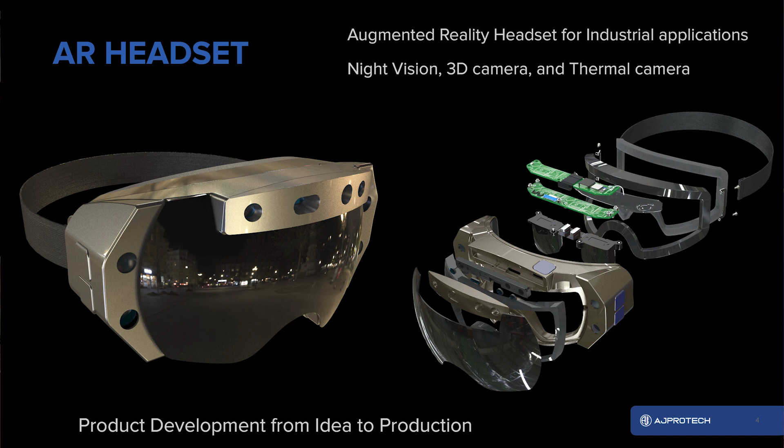At AJProTech, we do product development from idea to production, and I'm going to share a few case studies which you'll be referring to over the course of this presentation. The first one is an AR headset we've developed for the US Army, for industrial applications. The second one is Bluetooth industrial headphones with active noise cancellation and Bluetooth and radio. And finally is an IoT device, a small, portable Bluetooth padlock that uses a mobile phone to open and close the lock.

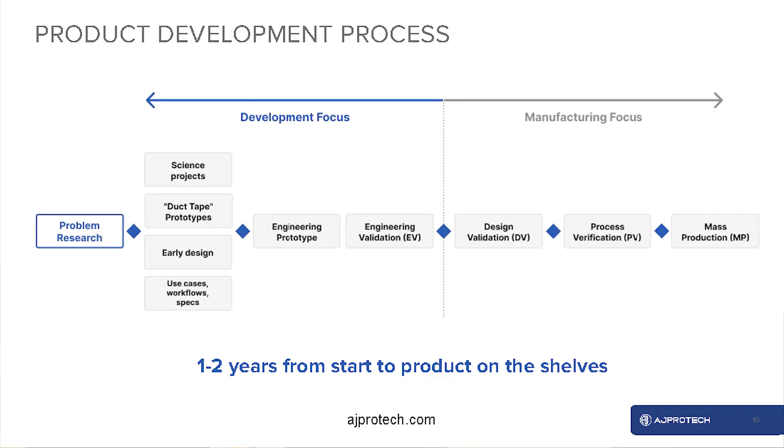So every one of you who is involved in a product development process probably heard about this workflow, when you start with a problem research, you do engineering prototypes, you go to 3 validation phases, EVT, DVT, and PVT, and then you go to production. On average, it might take anywhere from 1 to 2 years from start to product on the shelves, sometimes even longer. So following the process is really critical.

Every company has its own secrets and its own way to develop. I'm going to share a few secrets of ours. At AJProTech, when we start new projects, we start with a process called feasibility study. It's a time for us to do solution research, create product specification, create early industrial design, select components, and create proof of concept prototypes. The goal here is to select core technologies.

When clients come to us with an idea to create a new product, we ask them 4 questions. What problem are you solving? Who is your customer persona? What are the must-have features for the device? And what's the target pricing?

After those 4 questions are answered, we get to our job. We start with solution research, researching what similar components, similar products are available on the market, see what is patented and what can and cannot be used, and we select core technologies which allow us to fulfill the product requirement.

Next step is to create a really good product specification. Every company has its own vague, short requirements in most cases, but it's really important, it's really key here to be specific. A good product specification covers anywhere from 7 to 15 pages long, and it covers not just the must-have features, it covers the operating conditions, storage conditions, mechanical requirements, water protection, electronic features, and so on.

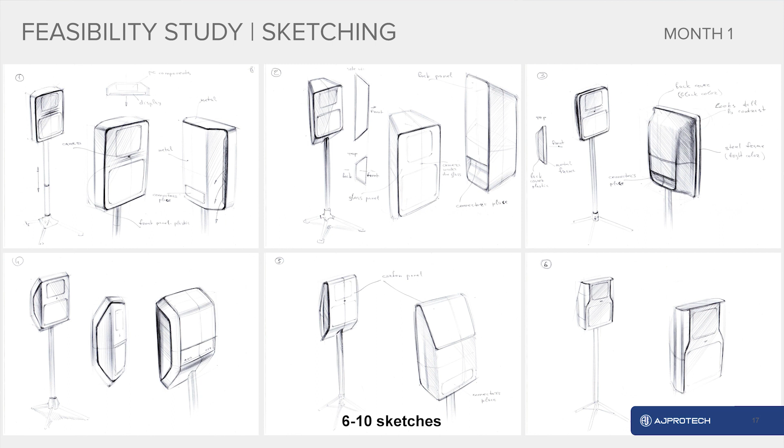Now that we know what we are creating, it's time to visualize it. Our industrial designers work on low fidelity sketches, 6 to 10 options, to determine what the possible shape for the device is. Is it going to be round or rectangular? What are the angles going to be? So we do 6 to 10 different options so we can pick from them later on.

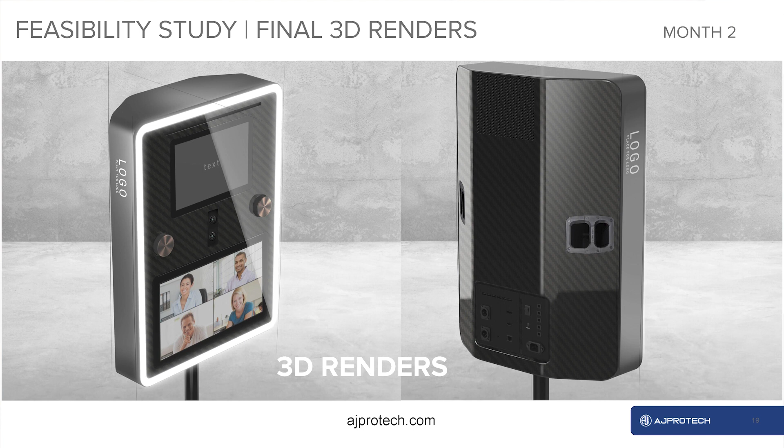The next step is when industrial design meets the actual components. It's a time for us to visualize how they're going to fit into the product. So we take 2 to 3 optimal sketches and we go deep with the integration. At the end, we have a set of high-quality renders, which can be used either for marketing or by mechanical engineers for further development.

Once we know what we want to create, it's time to create something tangible. We call it looks-like prototypes. They don't work, but they are the same size and shape as the final device. Nothing gives you more clarity on the product than feeling those products.

In parallel with the looks-like prototype, you want to prove core technologies. If your product has any sort of connectivity, get the evaluation board, get it connected, and get the sensor data to the device. Don't use Arduinos at this stage, use evaluation boards - this is how you save a lot of time later on. Just use evaluation boards which are close to what you're going to be using eventually. On average, it takes about 1 month to create such prototypes.

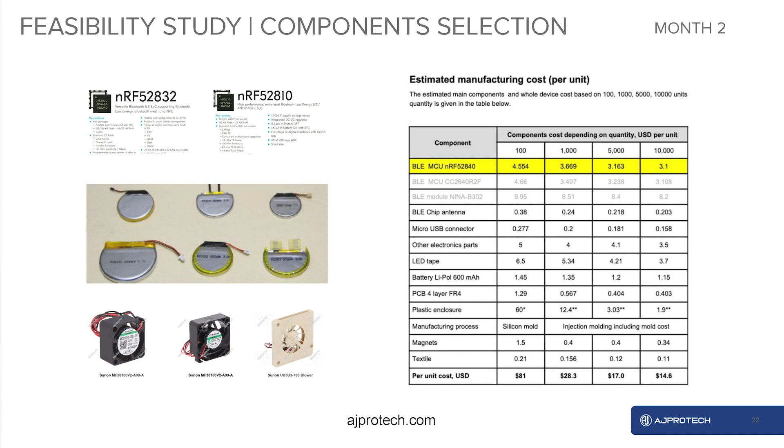Next phase is to select components. Before you put significant energy into engineering, you want to put everything you know about the product into the bill of materials and calculate the cost. You want to know how much it's going to cost before you design the actual physical product.

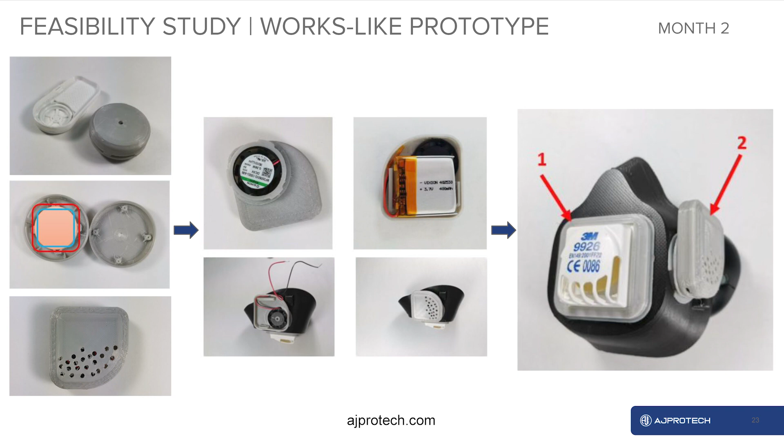Sometimes if it's unknown how the product is going to operate, it pays off to create a low fidelity working prototype. Just get a battery, get a fan, connect them together in a simple enclosure, and make sure the device works. On this example, we have a mask which was pulling the air inside, so we tested whether it's actually giving enough air.

Sometimes when the product is really complex, it makes sense to get a couple of evaluation boards and connect them together, so you have the entire device functionality assembled on a table. This example uses 2 evaluation boards and a set of wires to prototype the product before we go into functional prototypes.

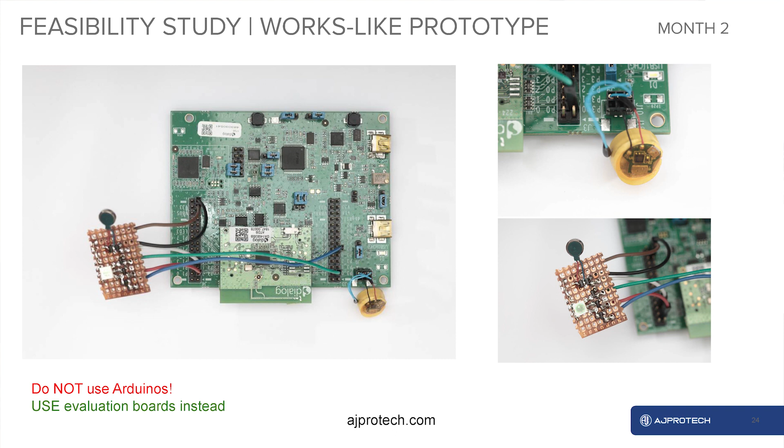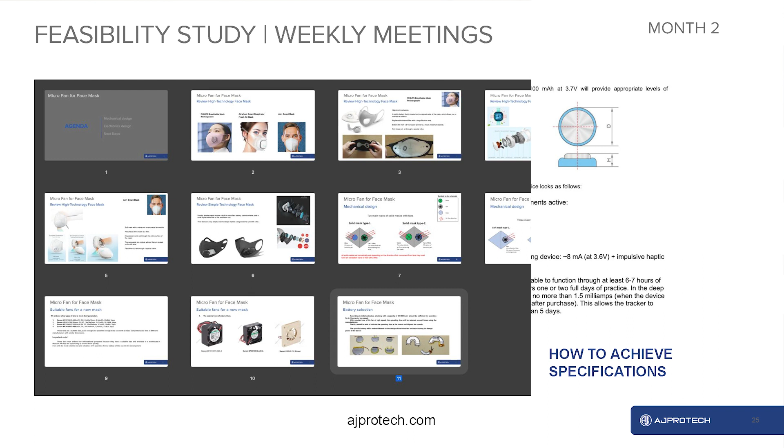Finally, once you know what components go inside and how it's going to look, it pays off to put everything in a document - we call it the technical proposal. When the specification documents what you're creating, the technical proposal documents how you're achieving those specifications. This document is typically about 10 pages long, and it documents everything you found out. It's really important to align all the stakeholders.

We recommend having weekly meetings with all the engineers, the product owner, and project manager, so they're all on the same page. Document all decisions made and keep all stakeholders aligned on the process. So that was the feasibility study - on average, it takes us about 2 months from idea to knowing exactly what we are working on.

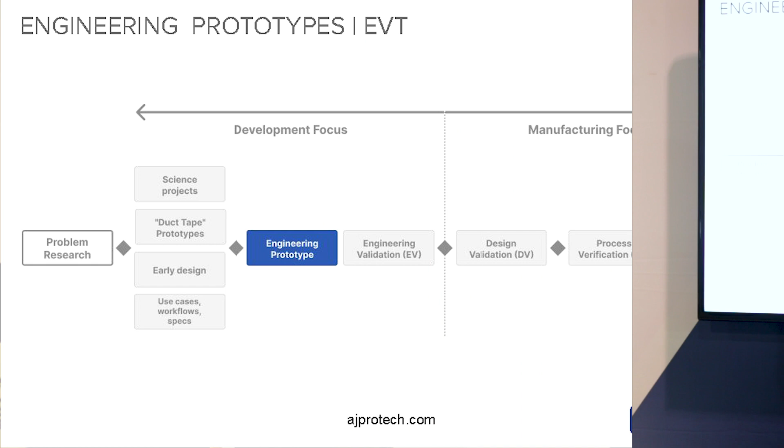Next step is engineering prototypes. This is the most intensive process for the entire product development, followed by engineering validation test at the end. The core goal at this stage is to validate all components. There is no tooling involved, no cost optimization, and unit cost is usually high.

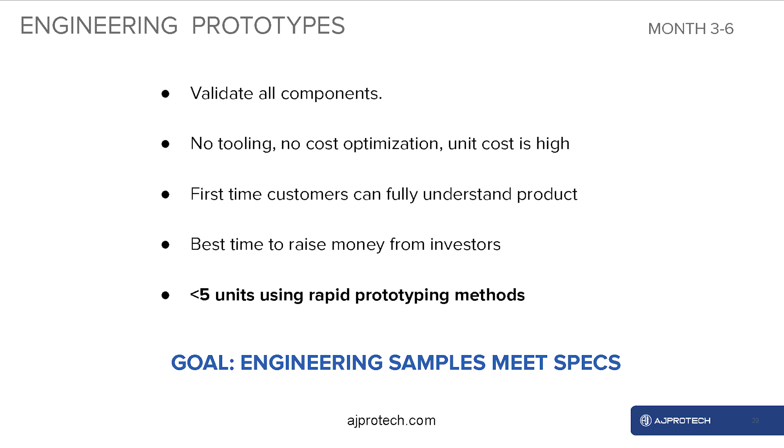It's a time when your first-time customers can fully understand the product. It's the best time to raise money from investors, and you usually create up to 5 prototypes which can be shown to potential customers. I'm going to show you a case study which we're going to be discussing later on.

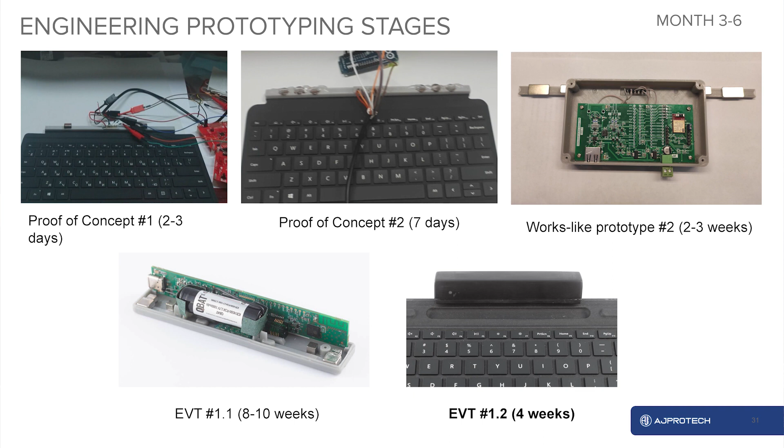This was an adapter for a Microsoft Surface keyboard, which you connect to the keyboard and then use it wirelessly. For that project, we created up to 5 prototypes. We started with just wires on a table, then evaluation boards with some magnets, followed by a PCB in a simple 3D printed enclosure, and then we compressed all of this into the final shape for the device and created good-looking prototypes with final shape and functionality. On average, it took us about 4 months to create all those iterations.

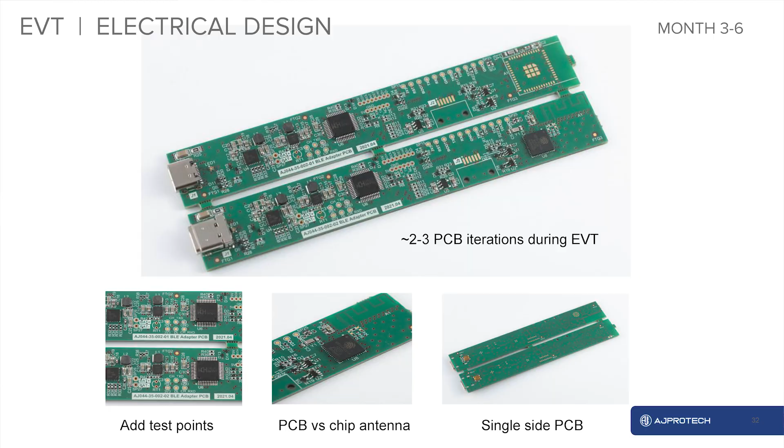Typically, you expect anywhere from 2 to 3 iterations of PCB design during prototyping. It's fine to have some wiring as long as the device does its job.

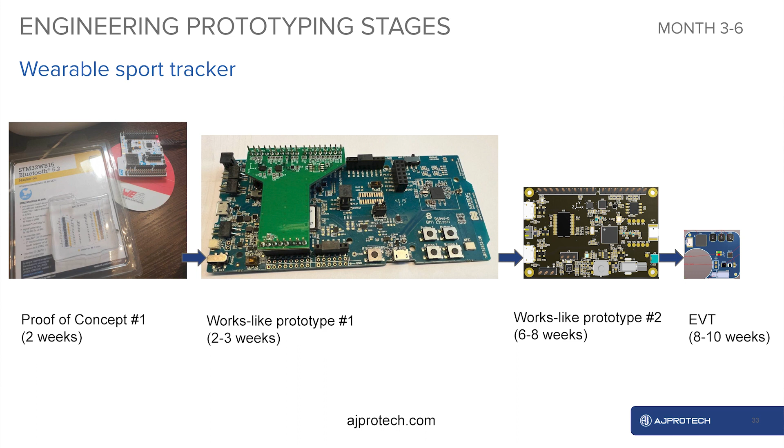Another recommendation for this phase is to add complexity gradually. There is no benefit of over-miniaturizing the device from early on - it's going to be very hard to troubleshoot. So start big on an evaluation board and eventually get smaller: validate components, validate schematic, and then make it final shape. This way, you don't waste time if something goes wrong early on.

As I mentioned, it's okay to use some additional wiring on the prototypes as long as they're functional. There is no need to be pretty here - the goal is to make it work.

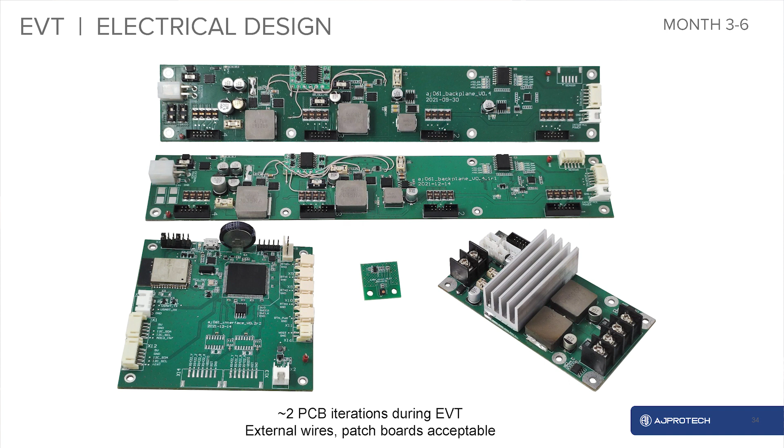A few recommendations for electrical designs: at EVT, forget about Raspberry Pis - they're nowhere near ready to be used in a product. Use evaluation boards instead if you need to.

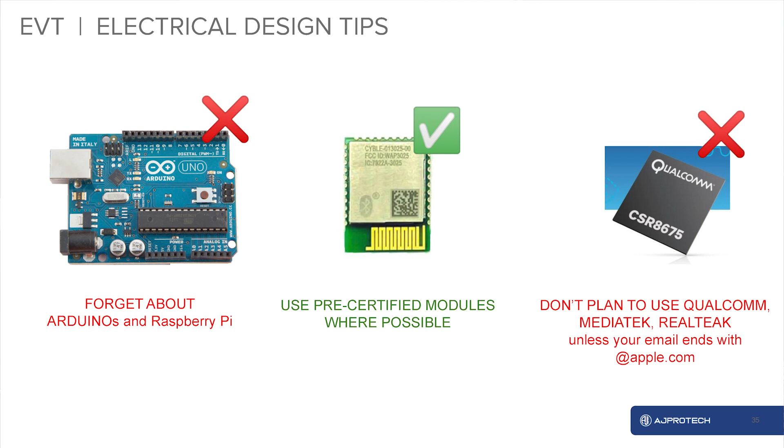Use pre-certified modules where possible - they allow you to simplify your product development and streamline your compliance. And finally, if your email doesn't end with apple.com or another big company, don't plan to use Qualcomm, MediaTek, and Realtek. They are really painful to work with, even to get some prototypes.

A few more recommendations for electrical engineers: check lead time prior to selecting parts. It's especially important in 2022 - most of our designs are driven by availability, not by functionality. It's a hard truth these days.

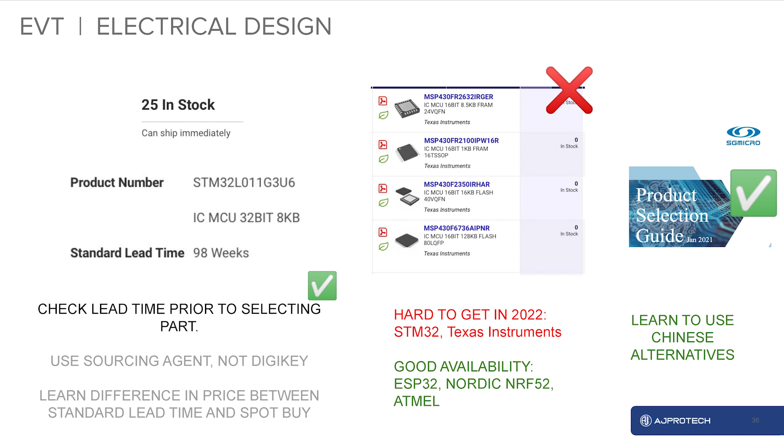Some components which are really hard to get these days are STM32, Texas Instruments. We switched them for ESP32, Nordic nRF52, and some Atmel components. And finally, learn how to use Chinese alternatives. Many of those companies have pin-to-pin replacements which perform the same as TI, but they are much easier to get these days.

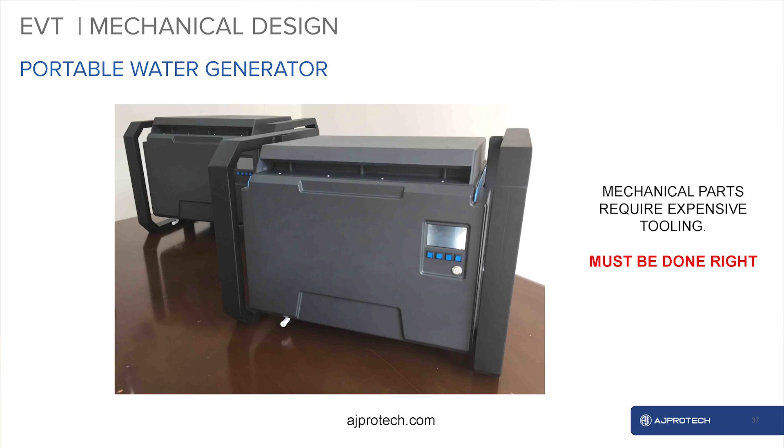So we covered electrical portion. Let's go to mechanical. For that one, I'm going to introduce another case study of ours, which is the portable water generator, which has a lot of mechanical parts. So this is going to showcase our mechanical job the best.

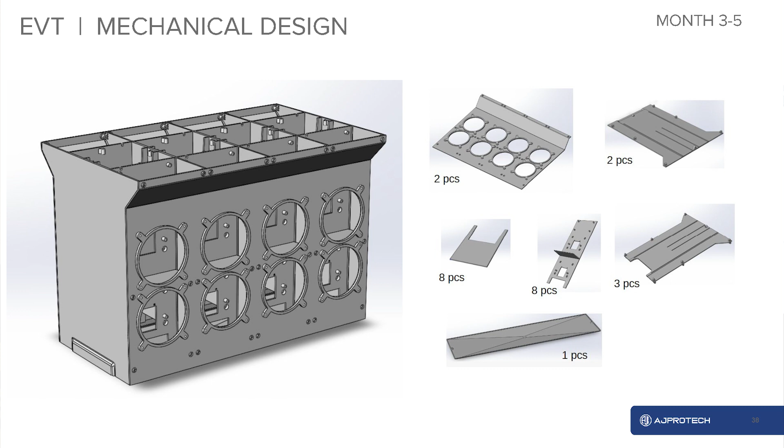When you start working on a prototype, you need to think how each part is going to be manufactured. So before you start doing any design, just divide your product into pieces and think about how each one of them is going to be manufactured.

There are multiple ways to prototype mechanical components. I'm going to cover 3D printing, CNC machining, and silicone mold. 3D prints are typically the easiest to get, no startup cost, they're cheap and fast. Quality is on average so-so. When you want to have better quality or better look, CNC machining is a better alternative. When you carve the unit out of solid piece of plastic, it requires some certain design considerations. For example, how far the mill can go in a plastic.

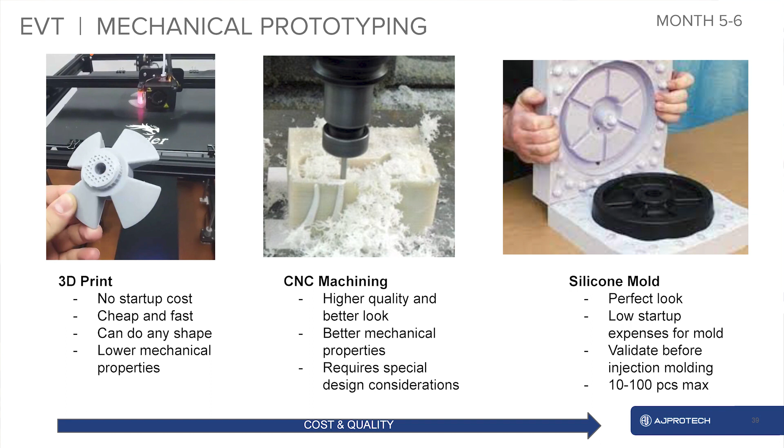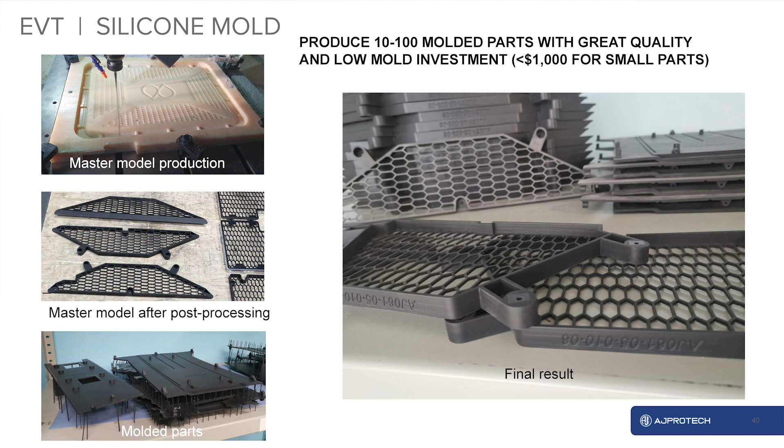And there is one other option which we use a lot. It's called silicone molding, and I'm going to cover this one in detail. This allows to create really high quality prototypes without big investment for tooling. So the way it works, you do the master model, either CNC machine or 3D printed, you polish it, you really make it look nice and feel nice. Then you put it in a solid piece of silicone to create a cavity, and then you pour the melt plastic inside that silicone. This way you can create anywhere from 10 to 100 pieces with really high quality and low investment into the tooling. Usually it's below $1,000 for small parts. And those components look exactly as the injection molded units, but you don't pay thousands of dollars for the mold.

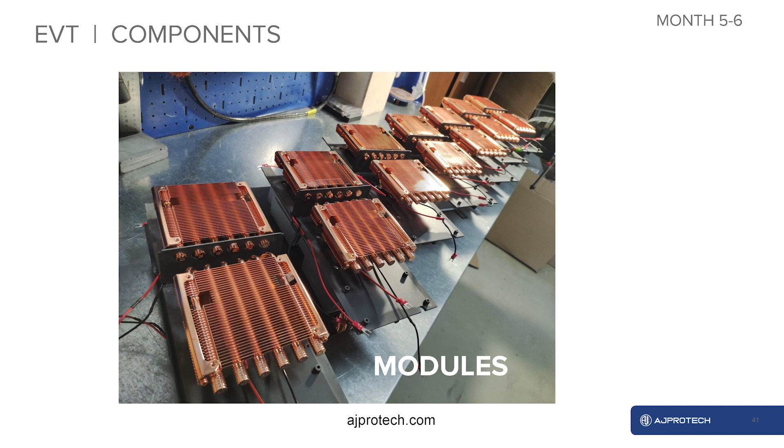Once mechanical components are there, assemble modules. This is the time to lock down on which components you're going to be using eventually. So take your time to validate things here. There are no significant changes for components after EVT phase.

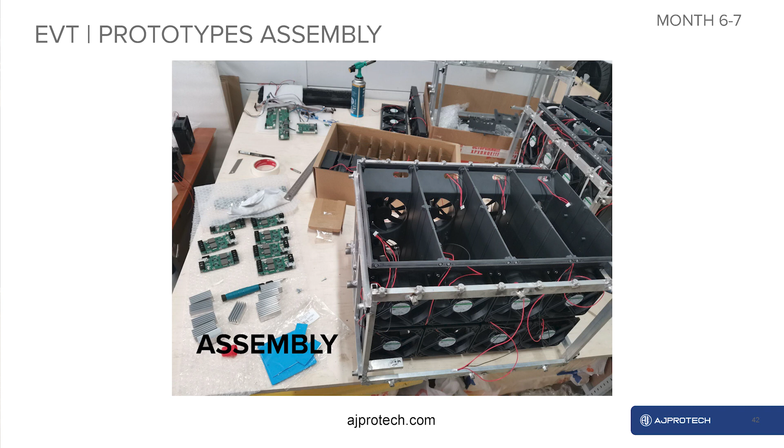Assembly. We recommend doing most of the assembly in-house, so don't involve CM at this stage. Engineers who are working on the design need to be involved in the assembly. They learn a lot, they see how it can be improved, so really take time to take this expertise in-house and see how things get together.

In parallel with mechanical, electrical, there should be work on the firmware. So firmware development, you start from the ground up, from how device powers up, how does the core functions, and you go all the way up to API and connectivity layer.

On average, we recommend spending at least 30% of time on validation. So if it takes you 3 months to develop firmware, allocate at least 1 month for complete testing. Test everything, because engineers like to rush into production, take some time here and really validate things.

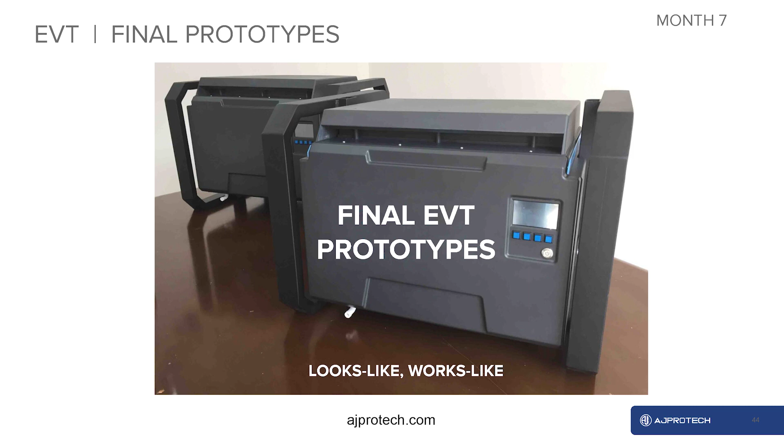At the end, it's really rewarding process. You get final EVT prototypes. They look like final product, they work like final product. They might have some cosmetic defects, they might have some finish differences or color differences, but they look really good and you can raise money with those.

And finally, many IoT products have some sort of connectivity to either mobile app or web app. So create an MVP product here, minimal viable product. Don't spend too much time and money on a fancy application. Just get the work done. Connect it, get all sensor data in the app, and go from there.

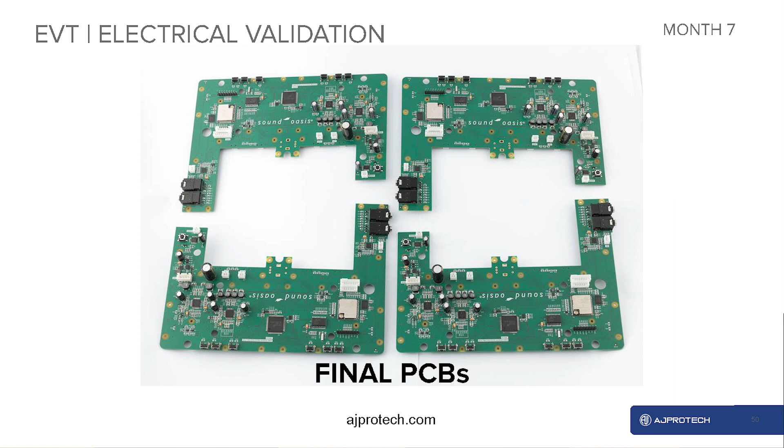You do functional tests. Functional tests are how device powers up, is all communication working, what's the power draw. So really the core functionality for the device is being tested here.

If the device has wireless connectivity, you test RSSI, you test the range for communication, and what we recommend doing is test how many devices can be working simultaneously in the same room. For example, Bluetooth has a limitation of about 7 devices, so it's really important to know what you're dealing with once you have wireless connectivity.

Another trick, another recommendation we have is to use thermal cameras a lot. The cooler your product runs, the more reliable it's going to be. So we do thermal analysis both on the PCBs and on the product. We see which part of the design gets hot, and we work from there. The cooler the device runs, the more stable it's going to operate. So really invest time in this testing here.

You lock components. There is no significant change of components after EVT. If needed, you go another iteration here, but don't plan to change it later on. When you start working with a CM, they're not going to accept much of the changes later on. So really lock your component database here.

So we covered engineering tests. Hopefully by the end of this, you have a set of working engineering prototypes, and you start thinking about going to their contract manufacturer. This is done at the DVT stage.

So what is typically done at DVT: you select a contract manufacturer who's going to be assembling your units. You do mechanical design for manufacturing optimization. You finalize electronics and firmware. There is some tooling needed to be done at this phase, so first shot tooling is done by the CM and they produce some of the key components here.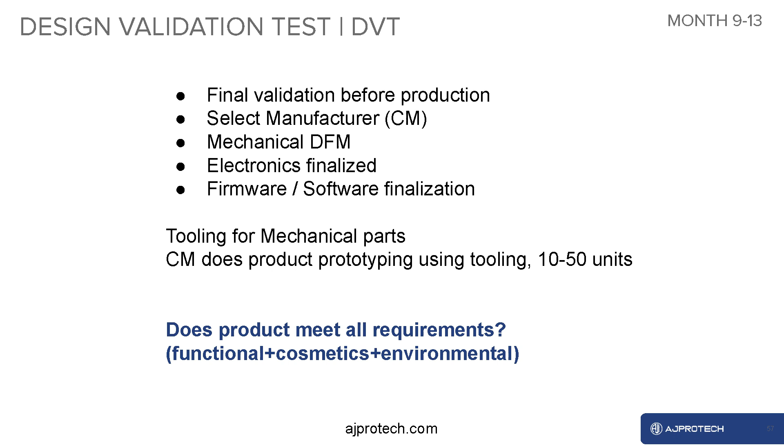The major question you answer at the end is, does the product meet all the requirements? Functional, cosmetics, and environmental. I'm going to share a word on how to work with the CMs.

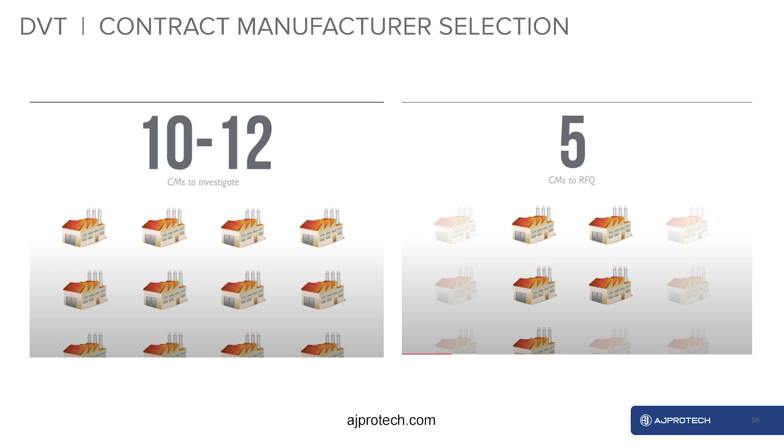So when you start, you need to find 10 to 12 CMs to investigate. You can find them on Alibaba, or other places. So out of the 12 which you found initially, you look at their portfolio, their capabilities, any potential conflict of interest. Approximately 5 of them might come to their process called request for quotation.

When you sign an NDA with them, share which documents they need to quote your product, and receive quotations from them. Out of those, you down select to about 3 of them, and we highly recommend visiting the factory - either go there yourself or hire an agent to go there for you. Don't skip this step, so you're not surprised later on.

Never select the manufacturer solely on price, and always have a backup option in mind. If something doesn't work out with the first one, you might want to have the second one, or use the second one to ramp up your production if things go really well.

Things you want to work with at the DVT stage is design for manufacturing. So you speak to the factory in the language of PowerPoint and Excel. That's the only language they understand.

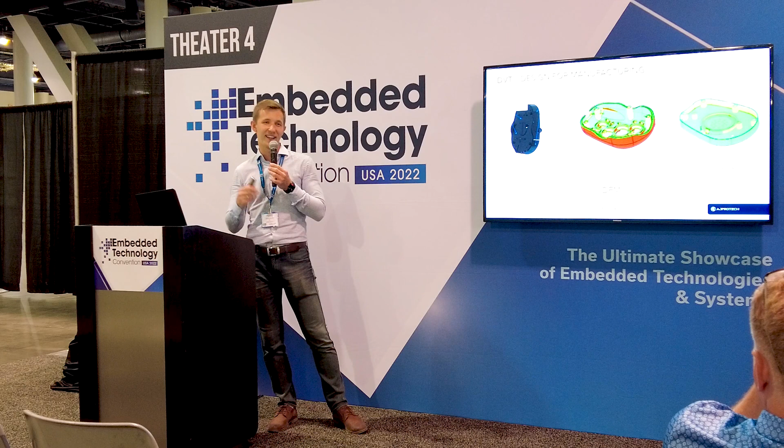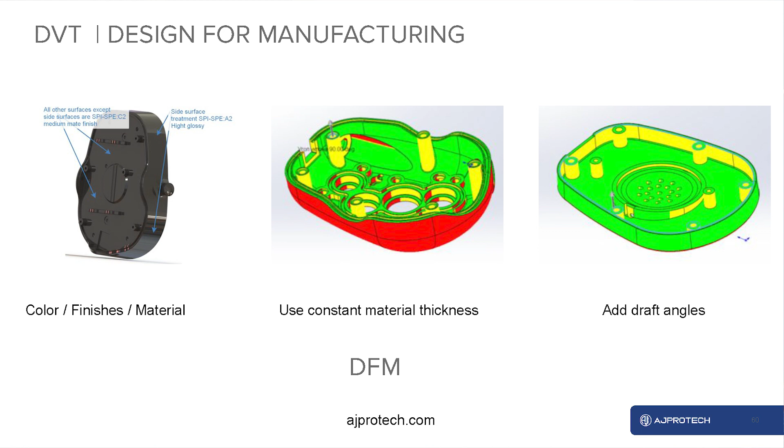So you specify the color, finishes, and material for the product. You optimize the design to use constant material thickness - that's really good for molding. And you add all the draft angles required for the product.

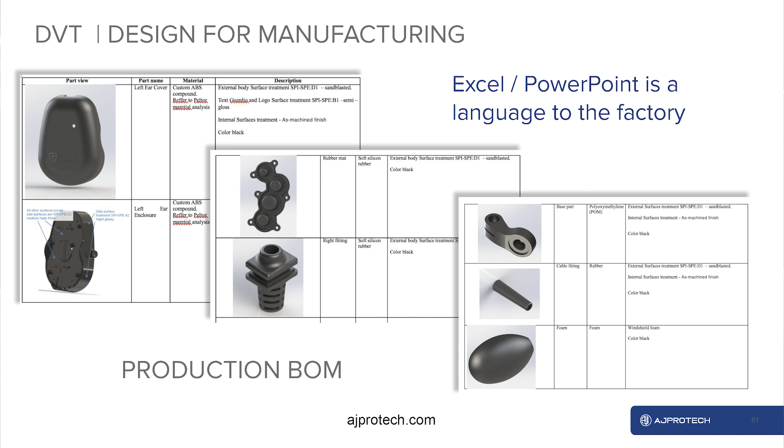As mentioned, you use Excel and PowerPoint as the universal language to speak to the factory. They're going to expect a production BOM from you, so really spend time on this one to deliver your vision to the factory. At the end of DVT, you're expected to have anywhere from 10 to 50 prototypes, which need to look good and perform as your final product, even though they're not revenuable yet.

As your production volume scales up, you need to invest time in scripting, so you don't test each individual unit separately. You create a script, typically in Python, to automate some of your testing. This is going to be used a lot at the production stage, so this is the time when you start investing time and money into this process.

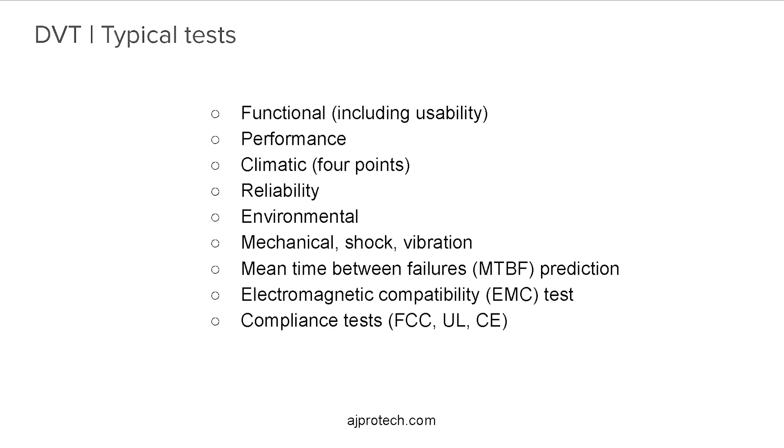Typical tests you run at the end of DVT are functional, including usability - does the product meet all the functions you defined for this one? Climatic - how the device operates in cold and hot conditions. Reliability - stress testing, mechanical shock vibration, mean time between failures, and EMC. You might even go as far as doing some pre-compliance testing, so FCC and UL might start here.

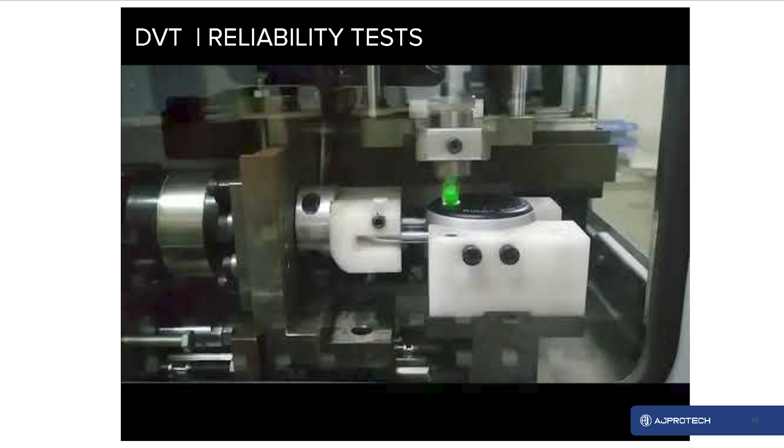On the case study of the smart Bluetooth padlock project, one of the core features was how many times we can press the buttons and put the shackle out before it fails. So we programmed a CNC machine at a factory to physically press the buttons and extract the shackle from it. It was running for weeks before we first saw any sort of failure and adjusted our design. So really don't skip this phase, don't produce your batch, and don't wait till it's too late.

Climatic testing, as I mentioned, you do thermal cycling - how the device performs when you cool it down and you heat it up.

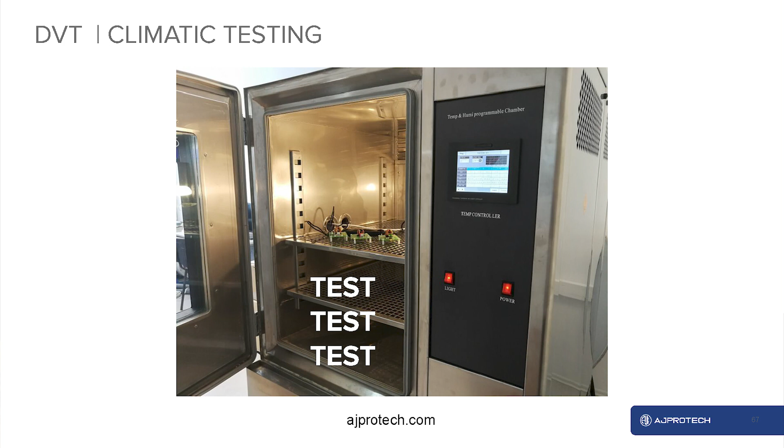The majority of products intended to be sold in the US need to go through EMC testing, EMI testing. Some audio products require you to test how well the microphones are working. So really invest time into testing this. When you select a CM, it's better to select a company who worked with these sort of products previously, so they might have that equipment already. It's really going to simplify and reduce your investment in this testing.

So we covered DVT. After DVT, we know the product performed as expected. One final step before production is called PVT, production validation test. This is when the factory prepares all the processes to get ready to mass produce your device. These are the first revenuable units which you can sell. Typically, you manufacture about 10% of your first batch. So if you want to produce about 5,000 units, your PVT size will be approximately 500 units.

At this time, the factory is investing time and effort into supply chain optimization, finding where they're going to be buying all the components. They prepare functional testing, create test jigs, and do some analysis. So the focus here switches from development to production.

As I mentioned, supply chain is the driving factor here, so the factory needs to be driving this: where they're going to buy each component, what's the lead time, how they prioritize spot buys, which are really expensive, versus when they buy from the market versus where they just plan and order parts with a lead time. You create testing jigs and fixtures, how you program the device and how you test it. This is done by the factory. A couple thousand dollars per jig is a typical cost at this stage.

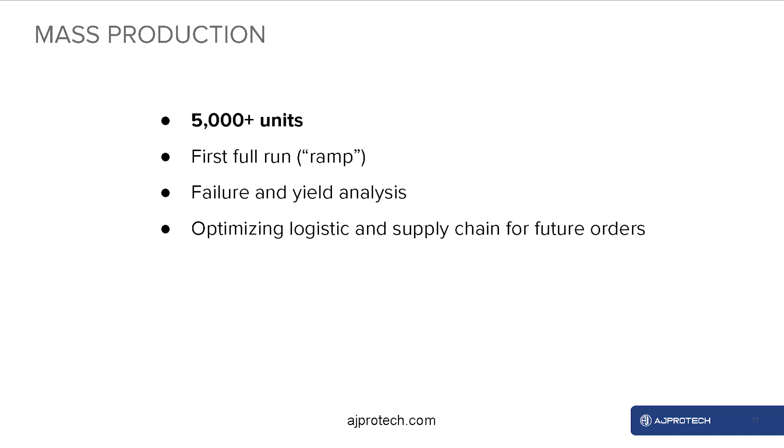A few words about mass production. It's really the last step in your journey, and typically mass production starts with 5,000 units plus. You do failure and yield analysis to see how many units out of the batch are not performing as expected, and you optimize logistics and supply chain. So the CM is driving the effort here, and they're the one responsible for keeping their production failure rate low.

Let's talk a little bit about minimum order quantity. There is a lot of discrepancy: some companies say mass production is 5,000 units, some say 10,000 units. The majority of CMs care about the volume of money coming through them, so they want to see at least $1 million worth of bill of materials coming through them. So if your product costs approximately $200 to make and you manufacture 5,000 units, that's going to be 1 million. They're going to be happy with this and they're going to take you on.

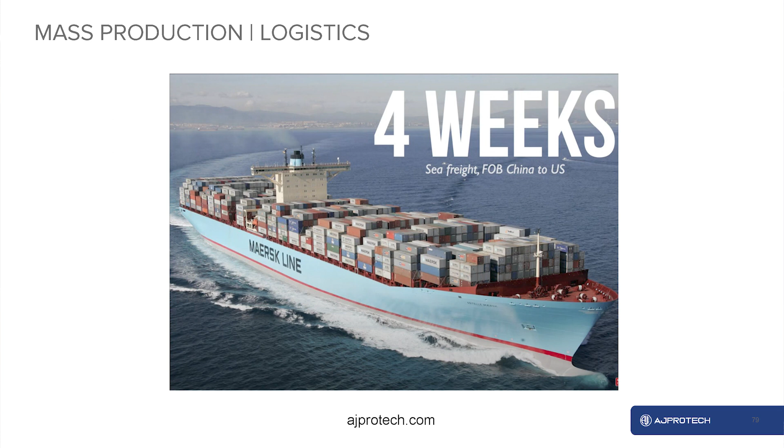If your unit costs only $100, you probably will need to invest in at least 10,000 units. So the benchmark here is 1 million worth of bill of materials coming through the CM. And when you do mass production, you no longer airship products. The only company that airships their products is Apple with their iPhones. You plan your production in a way that you can afford time for sea shipment. It's approximately 4 weeks from China to their port in the US, typically Long Beach for the West Coast.

So we covered the product. A few words about how we can help you on your product development journey. We do product development from idea to production. When companies come to us, we help them plan their products with a process called feasibility study, to create specifications and prove technologies. We help create engineering prototypes. Under 16 weeks, 3 to 4 months, we create high-quality engineering prototypes, and we help transform those designs to production in about 10 to 12 months after prototypes are available.

As I mentioned, the feasibility study is the first step we use for new products: specifications, sketches, 3D renders, component selection, product cost breakdown, and project schedule for the next phases.